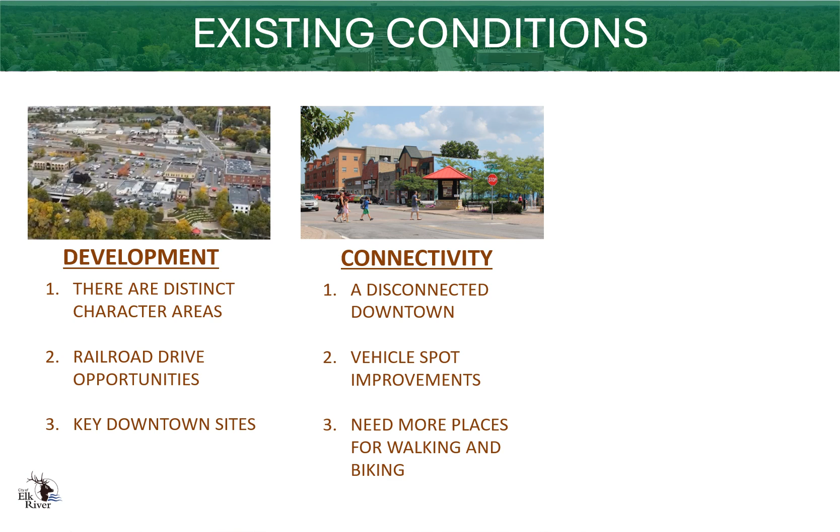With connectivity, downtown is disconnected from much of the rest of the city because of Highway 10, the rail line, and the Mississippi River. Improving downtown connectivity should look at key locations for vehicles while improving the overall experience for people biking and walking in and around the area.

For public space, the river is one of downtown's greatest assets. There should be more destination and park space along the river to draw people and activity downtown. Elsewhere, Main Street and Jackson Avenue should continue to play an important role in getting people in and around downtown, but also in hosting events and supporting area businesses. Finally, there should be more and more frequent events downtown throughout the year.

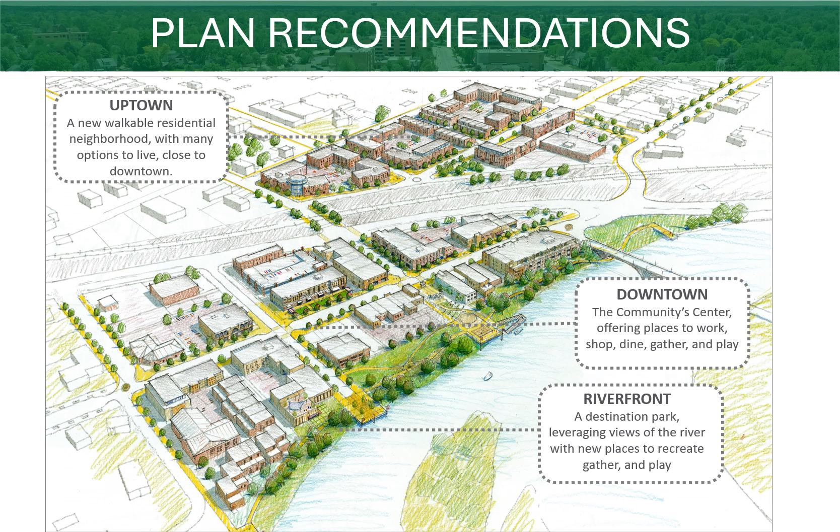Plan recommendations: the Elk River Downtown Plan recommendations are focused on 3 areas: downtown, the Riverfront, and Uptown, the area north of Highway 10. Each area has its own set of recommendations, which we'll spend a few minutes exploring.

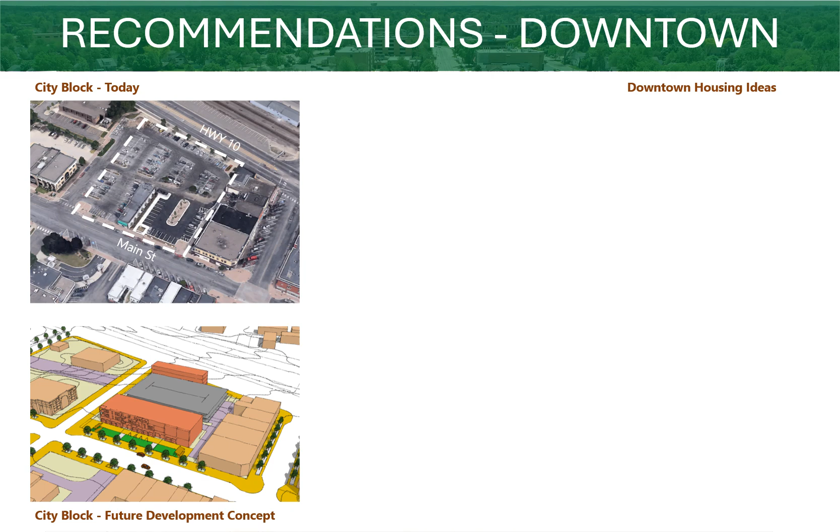In downtown, the plan recommends redeveloping a portion of the city-owned parking lot. New development should have stores or restaurants along Main Street with either offices or some market-rate housing on the upper floors. This development should also have a public park space that can be used for formal events or casual gatherings. The rest of the block should continue to be used for parking, possibly with a future parking garage.

The block between King Avenue and Lowell Avenue is envisioned to one day have future housing, stores, restaurants, and possibly a small hotel. Unlike the city-owned block, the King to Lowell block is all privately owned and will require willing sellers and developers.

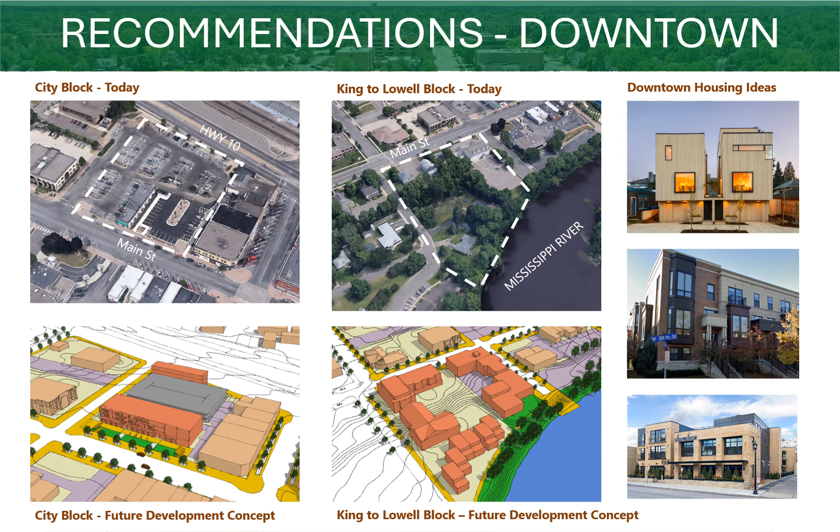Elsewhere in downtown, the city will need to reconstruct both Main Street and Jackson Avenue in the next few years to replace breaking pavers and aging utilities below the street. The plan recommends redesigning Main Street and Jackson Avenue with parallel parking on both sides of the street, wider sidewalks, and improved seating, lighting, and trees. This design will allow vehicles to continue comfortably moving downtown while creating more places for people to walk, gather, dine, shop, and space for events.

The potential impacts of reconstruction on Main Street and Jackson Avenue was discussed at length within the steering committee. As the design and timing of the street improvements are further finalized, the city is committed to working with downtown businesses and property owners to minimize impacts during construction.

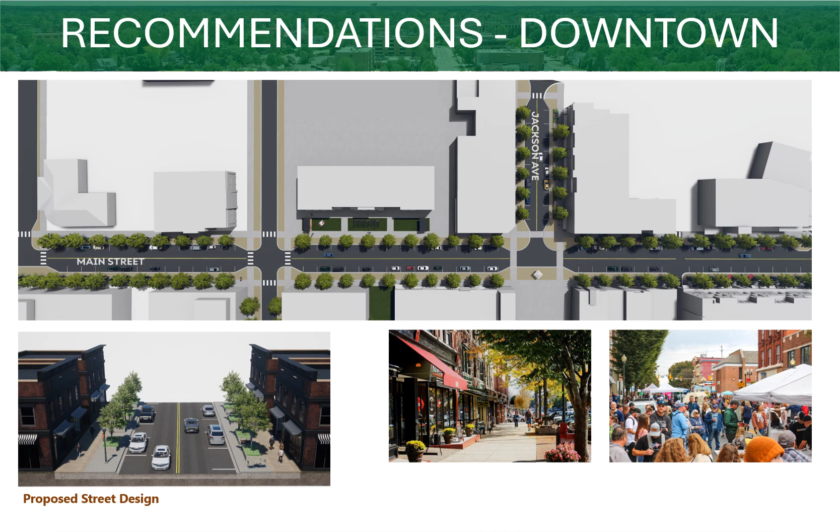Along the riverfront, the plan recommends phasing expansions to riverfront park space, building on River's Edge Commons Park. This new space will include space for small events and recreation and trails connecting to Bailey Point Nature Preserve. Because much of this land along the river is privately owned, the city will need to coordinate with current and future owners and willing sellers to phase in improvements over time. As such, expanding the riverfront will require close partnerships and patient implementation.

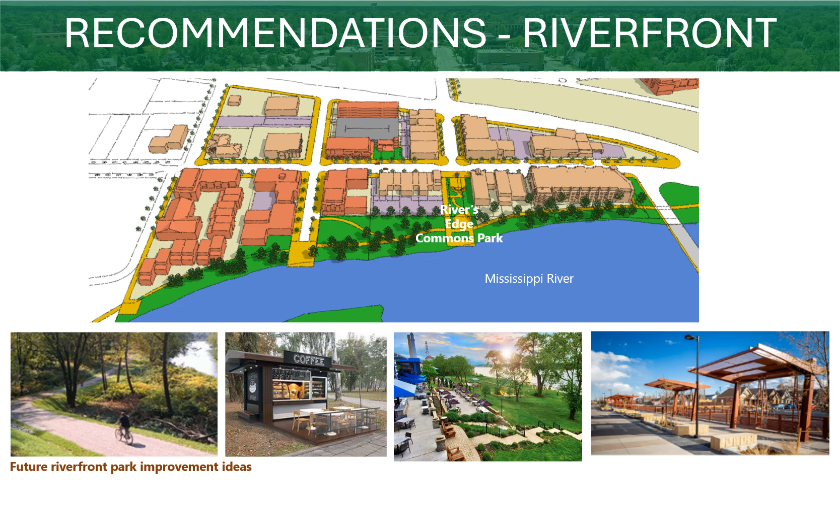Within Uptown, the area north of Highway 10, the plan suggests a walkable neighborhood that offers many different types of housing. The plan also recommends the city work to attract a small grocer to locate in Uptown that could serve the surrounding neighborhoods, downtown, and travelers along Highway 10.

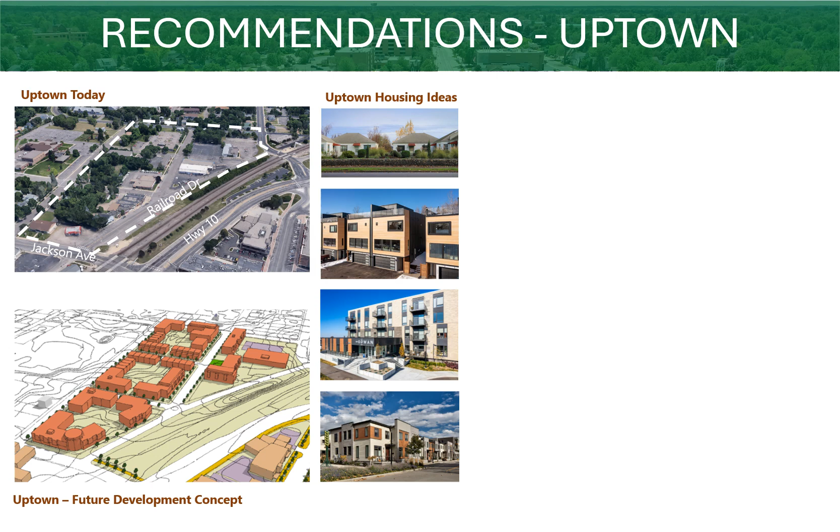Like the King to Lowell block in downtown, Uptown is all privately owned and will require willing sellers and developers. Because the plan anticipates incremental redevelopment over time, it intends to provide a vision for current and future owners to determine how best to use or redevelop their property.

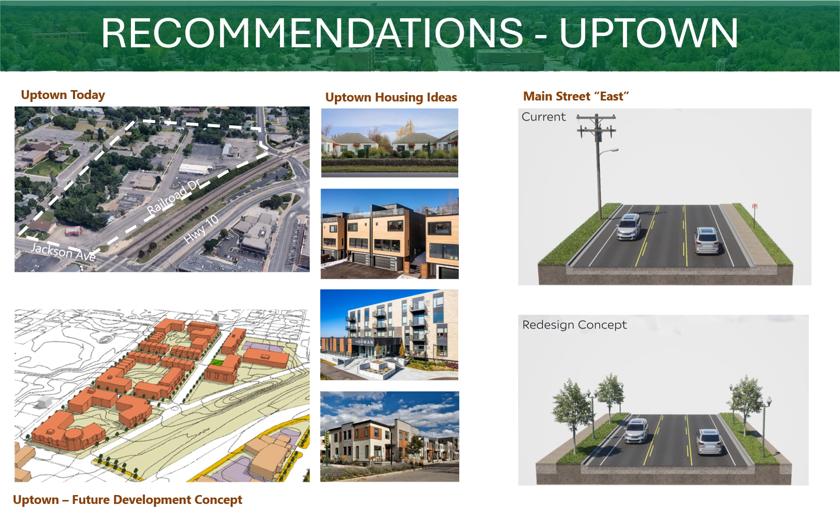Additionally, the plan outlines improvements that could occur along Main Street East between Highway 10 and Highway 169. These improvements include adding a sidewalk along the north side of the street, burying utilities, and adding more attractive lighting, signage, and trees.

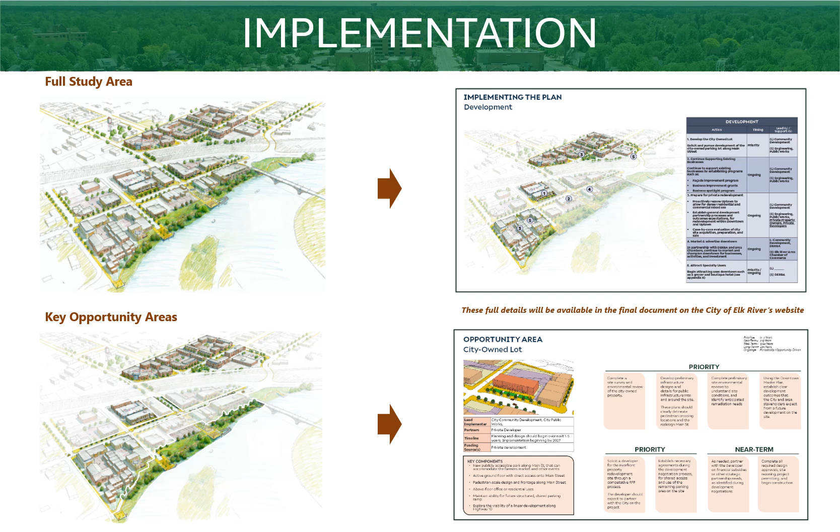Finally, the downtown plan outlines several action steps and strategies for the city and its partners to begin implementing the plan. Steps are organized by time and locations and include guidance on phasing projects over time. Similarly, they offer strategies on how to attract future businesses like a grocer or a hotel.